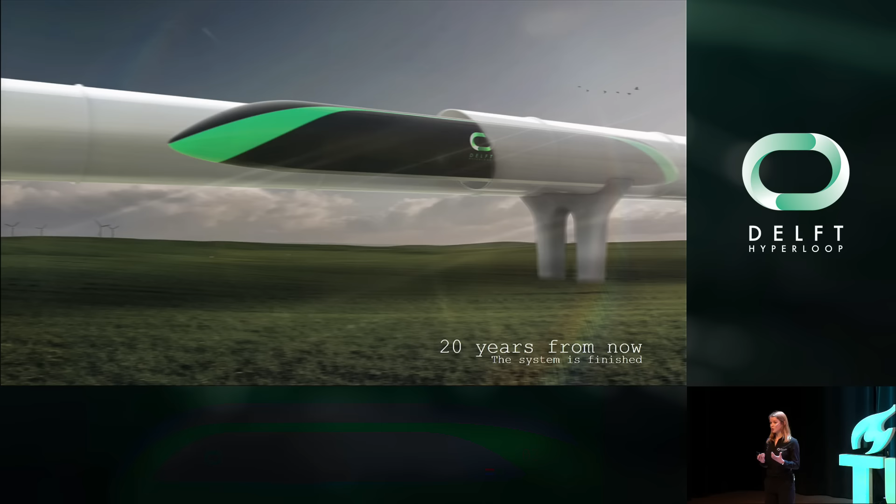So let me take you on a journey to what we envision the future to be like 20 years from now, and we'll slowly count back to where we are right now.

20 years from now, the system will be finished, and it will not only be relevant for us engineers anymore, but for you as well, the future Hyperloop passenger.

So what you encounter is, for instance, the station interior. You can see that it quite resembles a train station, with a lot of light colors, a lot of space. This is because we make use of the same system, a turn-up-and-go system.

This means that you can just go to the station and board whichever Hyperloop you choose.

The exterior of the station can also quite be compared to a train station. You can see that it is very light. It blends into urban spaces, but the large difference is that we don't need to have tracks on the surface.

Hyperloops in urban areas will travel underground, and this way they do not take up significant urban space at ground level.

Being safe is one thing, but feeling safe is at least equally important. Our engineers pay great care to the experience and feeling safe in this vehicle. You can see that we make use of a lot of light colors and natural materials to make sure that

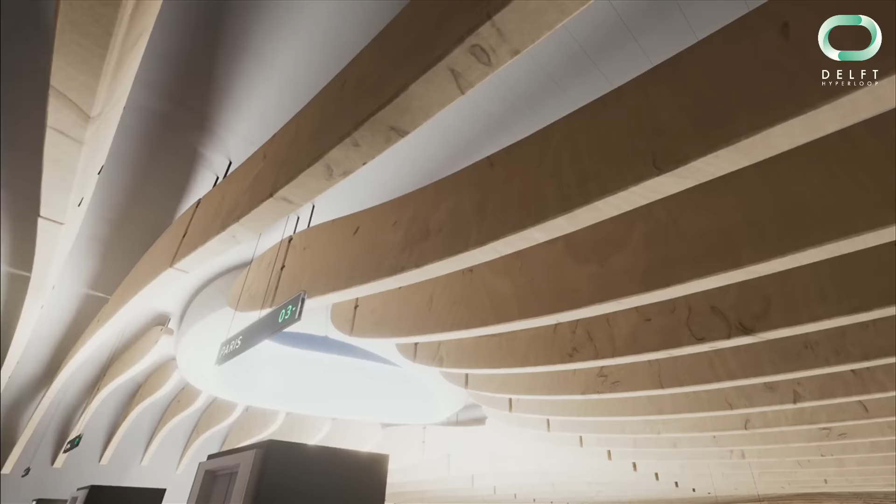You can see that the whole station resembles quite that of a train station. The Hyperloop tubes, even though they travel in a vacuum, enter airlocks before they enter the station, which means that you can safely see whatever is happening around you. You will not have to buy tickets in advance. You can just do that whenever you arrive at the station, and this means that you can leave whenever you like.

The Hyperloop stations have been designed in such a way that it is optimal for the passenger and designed intuitively, so that you will know exactly where to go without having annoying things in your face that tell you where to go.

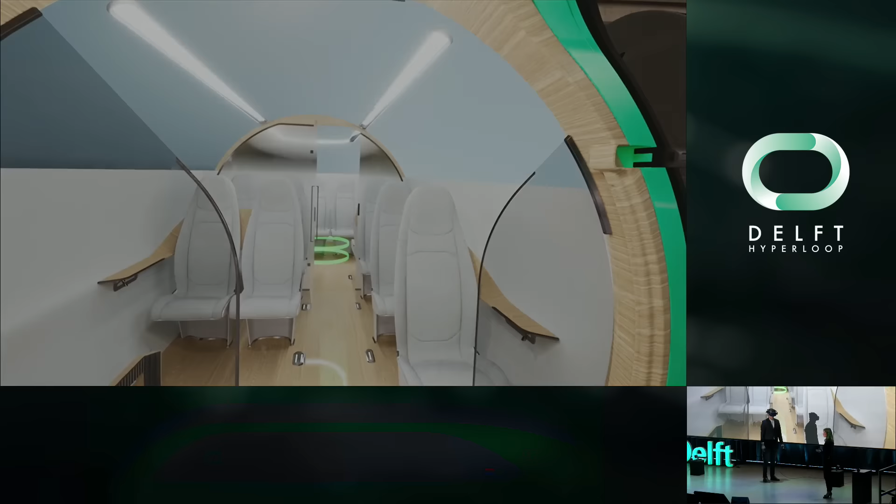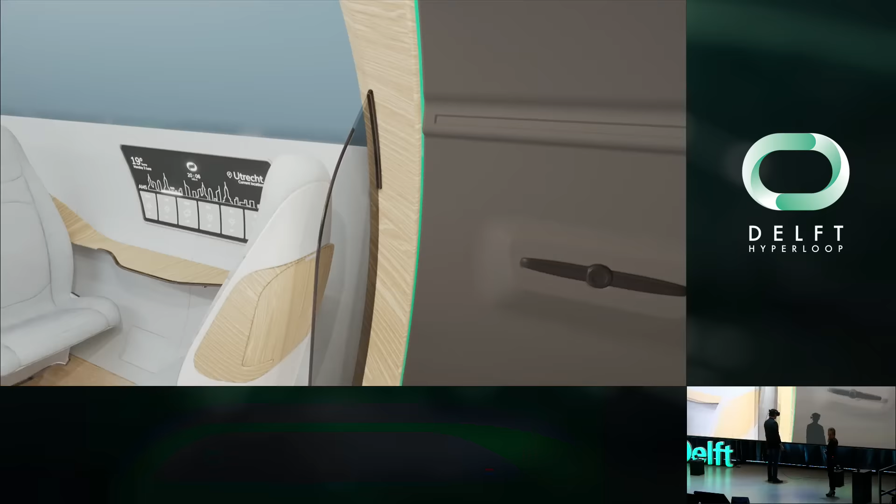The inside of the Hyperloop has been designed to feel as comfortable as possible. You can see the sky panel that mimics the light of day of your destination, which creates an open feel and a more natural feeling to your trip. The screens on the side can be used for whatever you like, to look up information of your destination or to share photos or videos with your peers. The door design is comparable to that of an airplane, as they pretty much travel in the same environment.

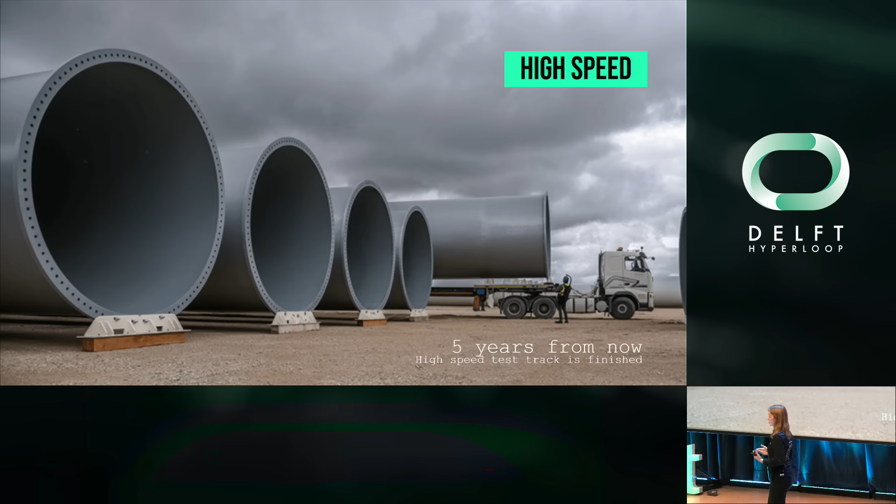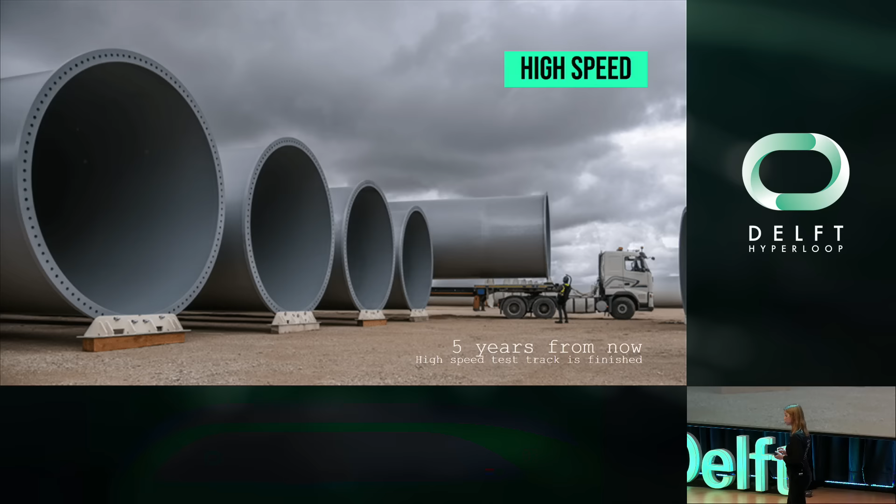To get here 10 years from now, 5 years from now, we will have to have the first high-speed test track. This high-speed test track is extremely important, as we need to guarantee safety for passengers and cargo traveling in these Hyperloop pods. We also need to be able to test out different types of Hyperloop systems, to test out all the various options we think are feasible, to make sure that in the end we can have one Hyperloop system that works for every situation. One of the key factors in creating this high-speed test track is to get politics and the government on board.

In fact, we are already cooperating with various government parties. As of today, we have actually published a report we wrote in collaboration with the government. And this becomes more and more important every day.

This is why Delft Hyperloop has launched Hyperloop Connected. Hyperloopconnected.com is a website where basically everyone can share their research and findings on the Hyperloop topic. We can see it is being used by us, students, but also by companies. It's made to create that one Hyperloop system, so every specialist can work on their specialist topic while still having one point where all the information is gathered. But it's not only for researchers, it's for anyone interested in the topic of Hyperloop. So if you want to know more, please feel encouraged to take a look at hyperloopconnected.com.

And this is what brings us to where we are today, the 3rd of June, 2019, where we will be revealing our brand new prototype. But before we dive into the specifications and the stories behind this vehicle, I would like to give you some background information as to why we're building this vehicle in the first place.

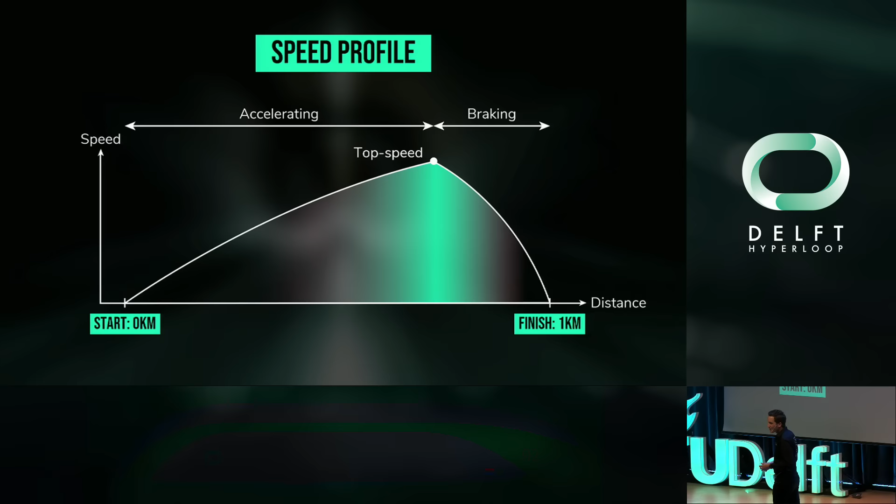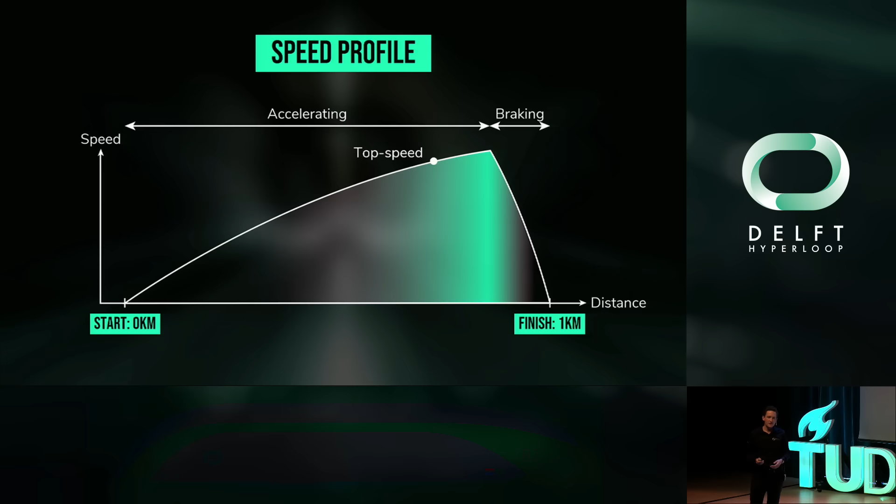And that introduced all kinds of new challenges. A perfect example of such a self-inflicted challenge is our braking performance, because at the end of that tube, we will need to brake and not hit that steel door at the end. So this is our pod speed profile, and we could determine that we need to brake faster. We could optimize our braking system. However, doing so would come at a cost, because all those braking forces would also be introduced in our other components, and we would have to reanalyze the entire design of our vehicle, make sure that all parts will survive these major loads. However, we decided to do so, and that also gained us benefits, because by shortening our braking distance, we can accelerate longer and thus reach a higher top speed.

Doing all of this in one year is a major challenge. Overcoming all of this is nearly impossible in one year. Yet the challenges we talked about so far are purely technological. And yes, we are here in Delft, and we like to talk about technology—it's called Delft University of Technology, after all. But these challenges just scratch the surface. They're the tip of the iceberg, and they do not cover the entire story.

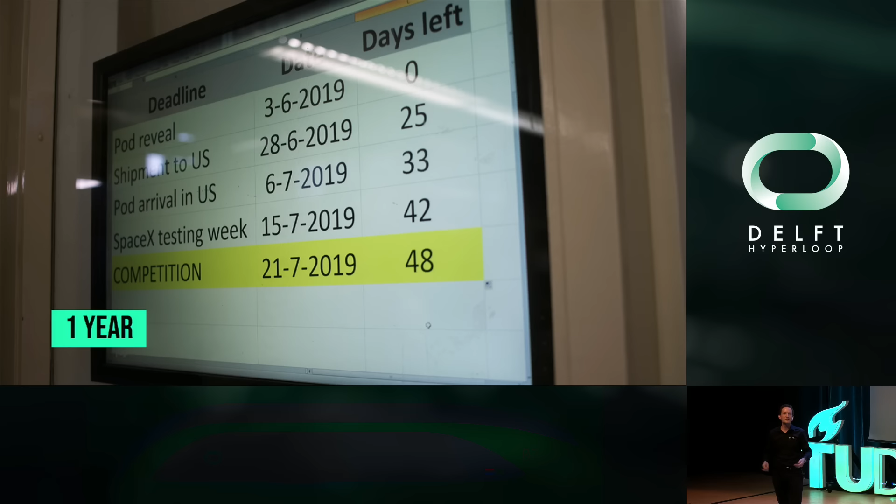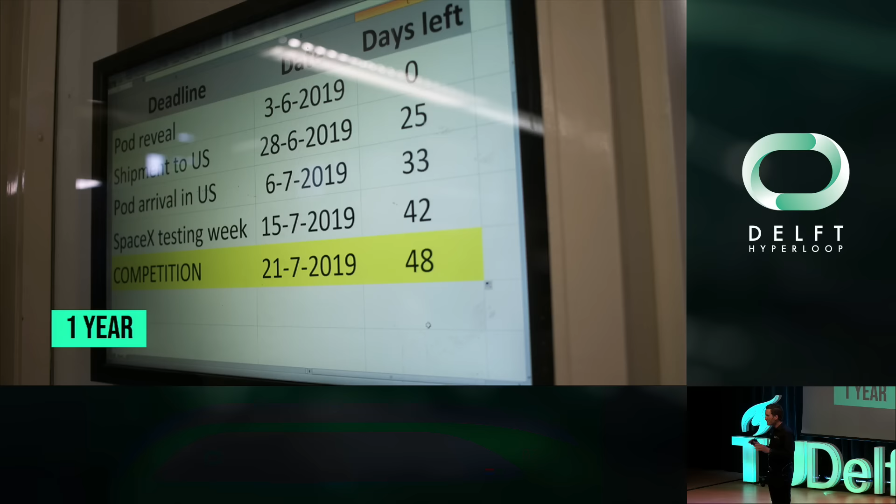All of these challenges are the ones we foresaw at the beginning of the year. We based our deadlines around it, determined our planning, and built our team structure around these challenges. However, you could also have foreseen them, even though you're not part of the team. This afternoon, I'd like to tell you some of the things we did not foresee—the unpredicted—because those things greatly shape our learning and our experience.

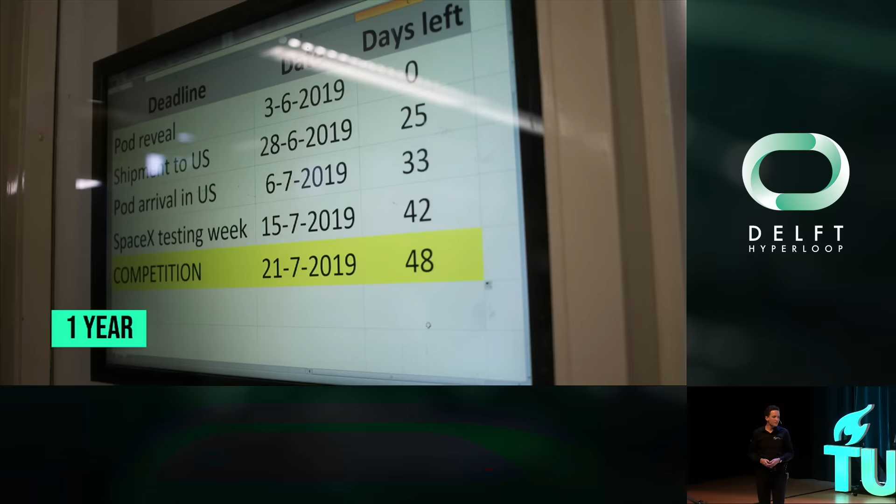We started the year with 40 team members. Within this team, we share a lot of similarities. We're all approximately the same age, most of us live in or around Delft, most of us have finished our bachelor's, and of course we're here with one clear goal: winning that competition.

But if we take a closer look, we can also find our differences, and some of them are easy to overcome. For example, we all have different body lengths, but we can deal with that—with some flexibility in how we cooperate, we overcame this challenge. We all have our own different habits and ways and styles of working, but that's fine, we got used to that after several weeks.

But we also have 11 different educational backgrounds in our team. And that's a good thing, because we have specialists who can work on the subsystems of our pod—someone good at working on each of those subsystems. However, it's also like we're speaking a different language. We all have our own set of skills that match our studies, and sometimes that does cause some difficulties.

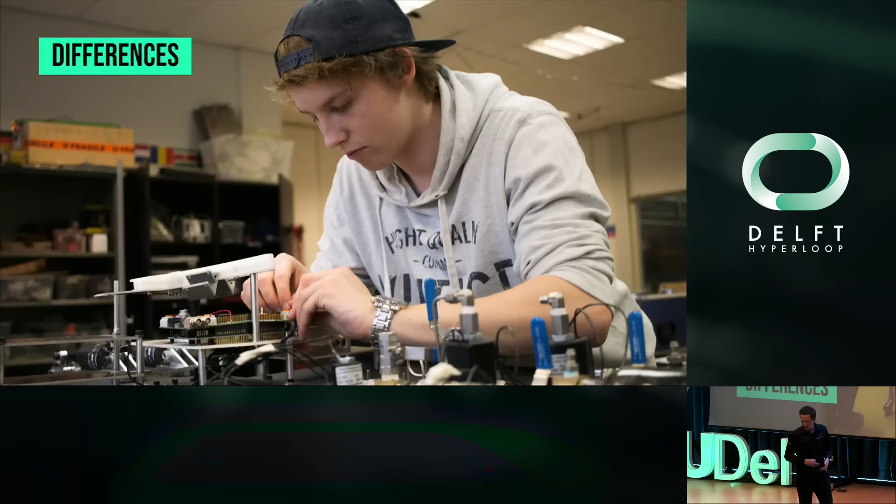For example, this is Detmer. He's the lead of our navigation and control department, and I still recall the first meeting I had with him. I went down to his workplace and we tried to talk about planning. But instead of replying to my questions, Detmer started talking in 3-letter abbreviations—I'm working on the EMS, the FSM, the IMU—and I had no clue what he was talking about. I didn't understand his language. So that meeting, we did not talk about planning; instead we talked about the way we work, and we learned how to communicate together.

Even though we have differences within the team, we're all still located here in Delft, the Netherlands, so we're working according to approximately the same rhythm and enjoying the same holidays. But as a high-tech engineering team, we work together with companies from all around the world, and we find different cultures at other places. For example, we work with a Chinese company that manufactures our battery cells.

One of the major holidays in Chinese culture is Chinese New Year. When we started this year, we had no clue that this event would shape our own planning and our internal deadlines. But as soon as we figured out that China goes on lockdown for a few weeks during Chinese New Year, we had to shift quickly, because the powertrain engineers had to design the batteries, test the cells, and order them before Chinese New Year would start.

But there's more to the story, because this is not only about the surprise of different deadlines we find due to cultures around the world—it's also one of the first instances where we were surprised by the difference between theory and reality. We had been designing our battery system around a specific cell we found on the internet that would outperform all other cells. Then we started testing, and we found a cell that was even better—it outperformed our original design.

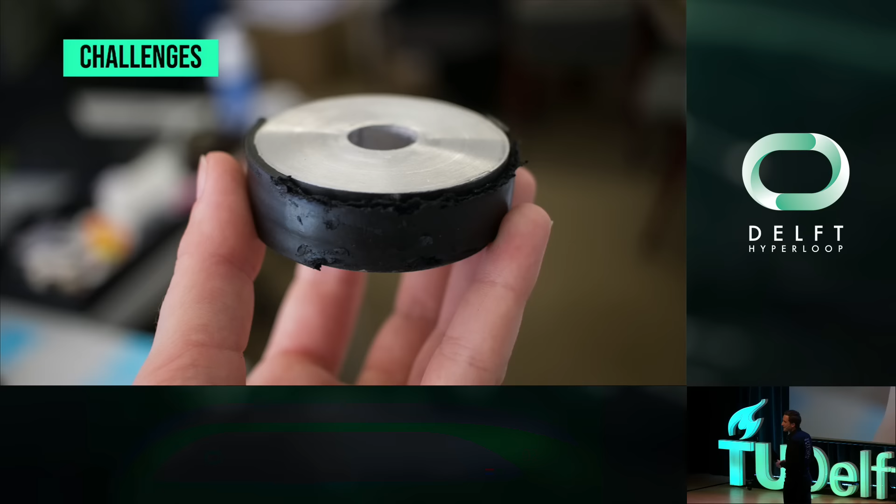As I mentioned, our wheels will rotate at hundreds of rotations per second when we are reaching our top speed. And while doing so, they will hit the bumps that are caused by the track misalignments. And this is a major, complex dynamic problem that's almost impossible to calculate or to model in a computer. So what we do here, we get our theory as good as possible.

We make the best design we can come up with, and then start testing. And in these cases, it's not about reading the manual, it's about making your own. And overcoming these challenges is not only about the result itself, it's about learning, it's about discovering, and it's about finding our own strengths and our own weaknesses.

At the beginning of the year, we knew that one day we would enter the production phase. And as we have a totally customly designed vehicle, we knew that many of our parts would have to be produced by ourselves. We cannot go over to the store and buy our suspension mechanism. It just does not exist. So we need to make it ourselves.

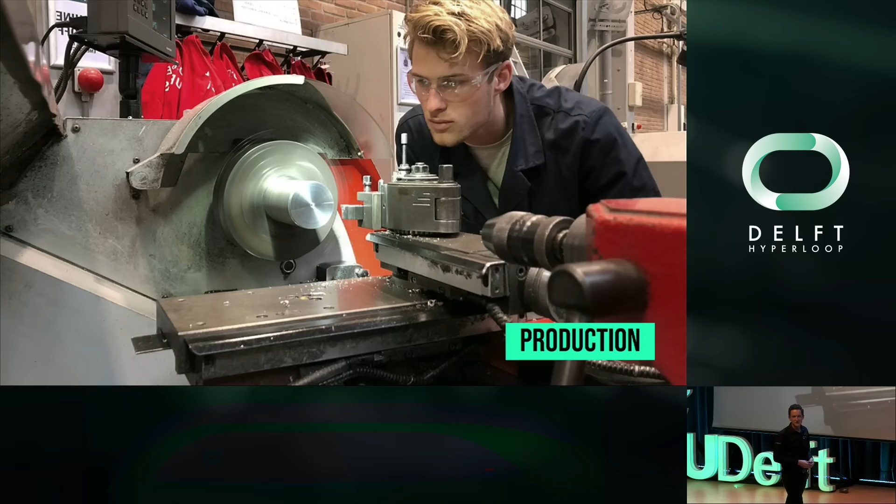But also, at the beginning of the year, most of our team members had never touched a machine before. We didn't know who would be good at turning, we didn't know who would be good at milling, and we had no clue whose talent lies at what machine. But what we did know is that we would have to make all these parts by ourselves.

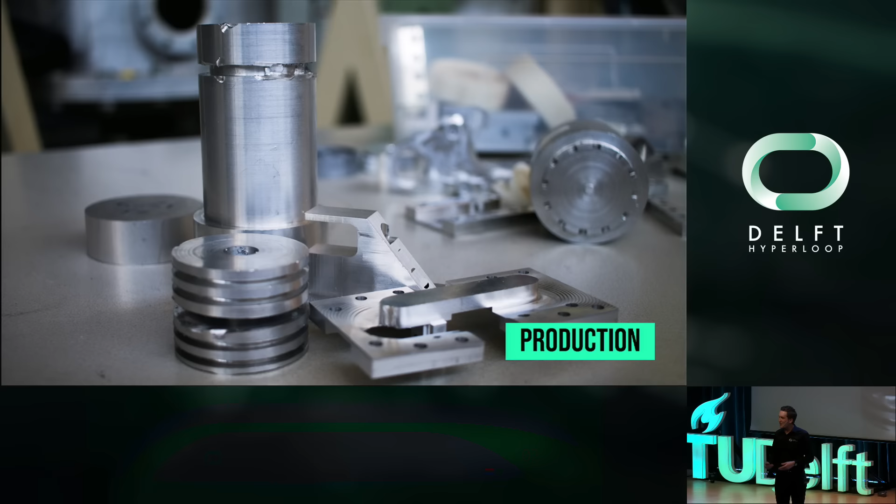And at the beginning of our production phase, mistakes were made, and we have a whole collection of failed parts in our office. But that's fine. In the end, we're all doing this for the first time, and we need to learn by trial and error. We need to learn how to do this.

But after several weeks, we still had barely any parts that were approved during our quality control. And time was running out, as our assembly deadline was already approaching. So we sat down with the entire production crew and we had a meeting. And we discussed, how can we solve this? How can we make sure that we finish our parts in time?

And we determined who was good at operating what specific machine. We determined who was good at making what specific part. And we matched our strengths with our challenges.

But these failed parts were not only caused by our own mistakes, we also had some bad luck. Upon inspection, we found a caliper, which is a measurement device, that had a deviation of 0.2 millimeter. And this might not sound as much, in the end it's only the thickness of a sheet of paper. But for our purposes, this is not good enough.

For many other applications, a deviation of 0.2 millimeter will be fine. You can just use the part and everything will work as it should. But in our case, a deviation of 0.2 millimeter might lead to the part failing at high speeds, or might lead to entire assemblies not fitting together anymore. So we had to stick to our own quality criteria, and we redid all of those parts that deviated by the thickness of a sheet of paper.

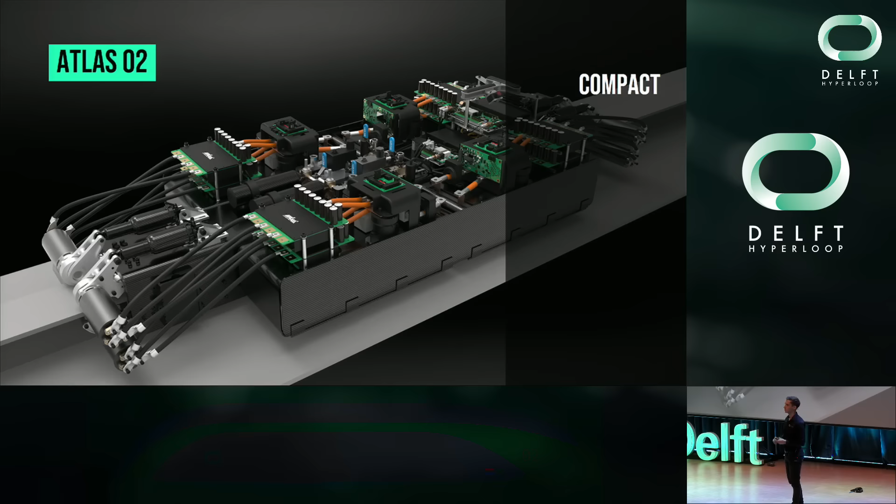Secondly, we have a fully electric vehicle, and this allows us to quickly accelerate from standstill in a short period of time. Without any mechanical components, we can do this easier.

During the run, ATLAS02 functions fully autonomous, meaning it makes decisions and controls the pod without any user input. At these high speeds, human reaction time is just not fast enough anymore. We need to make split-second decisions, which is what the onboard computers can do.

Furthermore, the vehicle is wheel-driven. It's propelled by 8 electric rotary motors. By using electric rotary motors, we can propel efficiently, but most importantly, with very little mass, and this allows for a quick acceleration to our top speed.

I will explain the pod's functionality and properties by walking you through a final run, that one final run at this competition. So imagine it's the 21st of July, competition day. The whole team will have gathered in front of the SpaceX headquarters next to this vacuum tube. We transport this pod just in front of the tube.

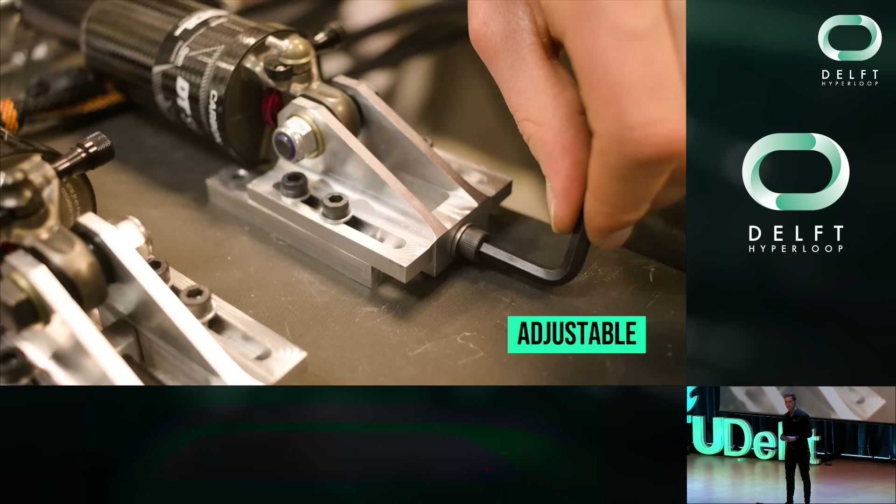Having cranked out these numbers with the vehicle dynamics model, we install them on the pod. We set the right configuration on the shock dampers and put them into the correct orientation with the adjustable brackets, ensuring we have exactly the right clamp force. After the whole suspension is set, we can power on the vehicle, by a simple press of the button on top of the pod.

All the low voltage electronics will be powered on, including the CPUs, which are the computers acting as the brain of our vehicle. With all the data it gathers, they can make split-second decisions, which is just what we need.

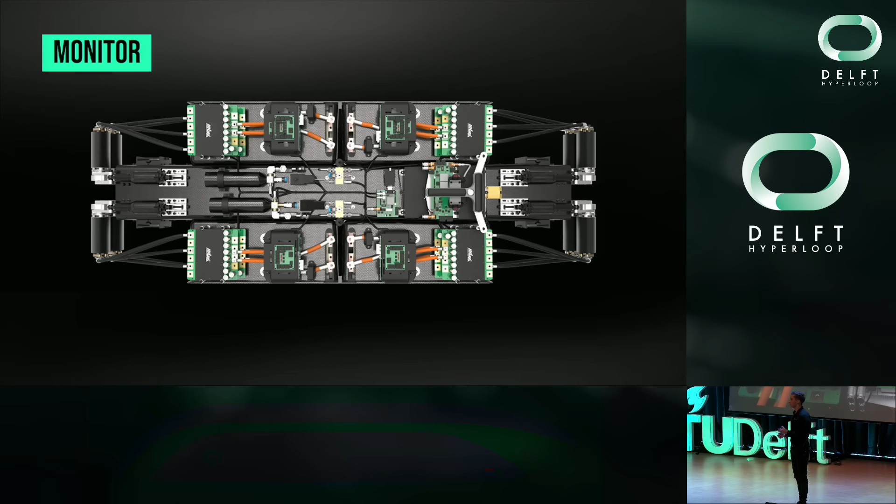The pod will automatically establish communication with the user outside of the tube, and the user can monitor the pod. It can see, for instance, the speeds of the drive wheels, which we can derive the speeds from. The battery health, by looking at the temperature and voltage, ensuring healthy batteries before we commence a run. We have brake pressure to check whether we have enough storage on board to quickly brake to standstill at the end of a run. And, for instance, the ambient temperature and pressure, knowing exactly at which conditions the pod runs.

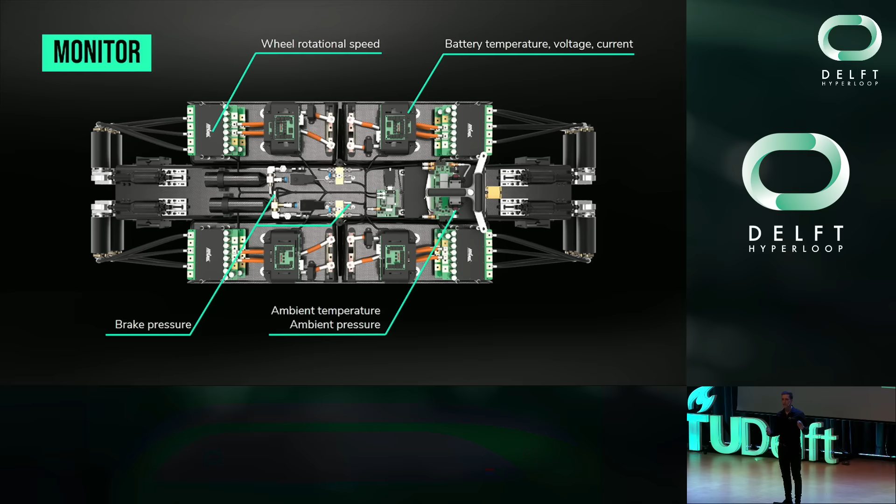The communication is established, and now we can pressurize the pneumatics, the high pressurized air system we use to activate the brakes. We pressurize the pneumatics with over 50 times atmospheric pressure, allowing for compact and lightweight energy storage, which you can use to explosively brake to a standstill. The pneumatics are pressurized, marking the end of this phase.

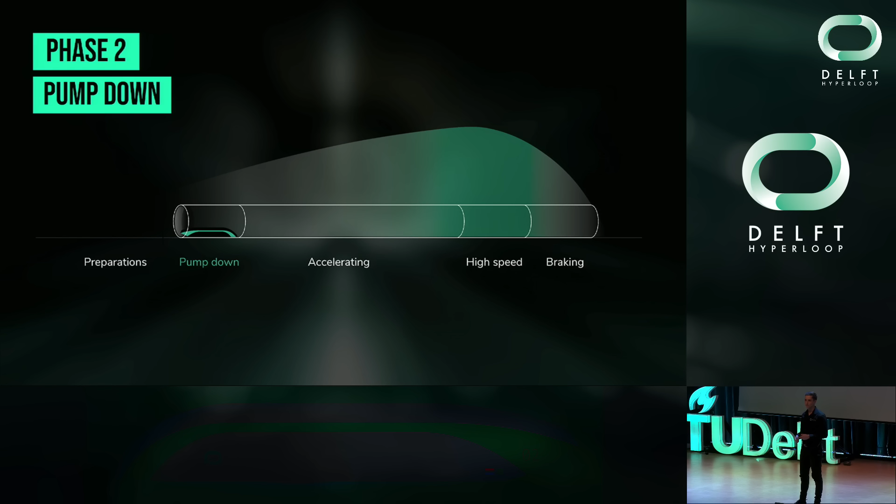We can proceed to the pump down phase. The pod will be transported to the start of the tube, and the SpaceX employees will close the 2 doors at both ends. The pump down will commence.

While the pressure in the tube is going down and we're reaching near vacuum, the tension in the team is building up. Because at this moment, everyone in the team knows that we're approaching the moment we've worked an entire year for. Everything has to come together. There's no room for errors. There's no room for inaccuracies.

We have to go. So we issue a final command. We launch, and the pod quickly surges forward, reaching towards the end of the tube. And we're in the next phase, the accelerating phase.

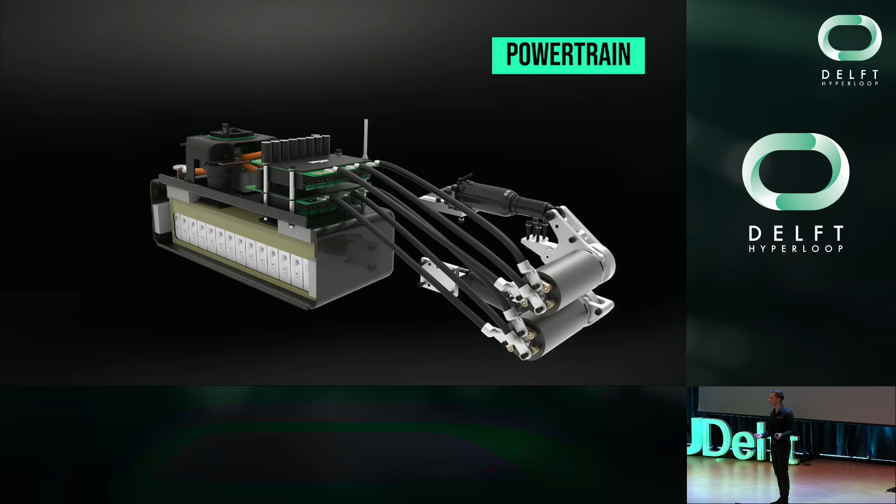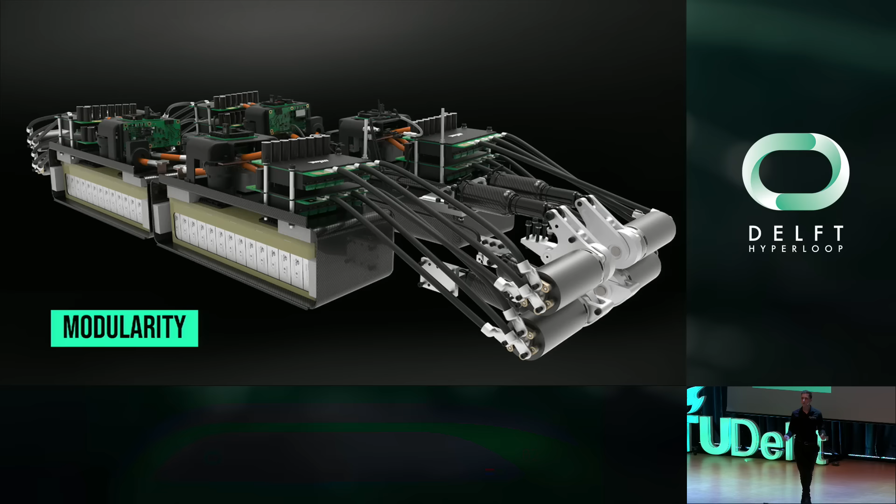At the core of this acceleration, we have the powertrain. The powertrain consists of a battery pack, 2 motor controllers, 2 motors, and 2 drive wheel mechanisms. One of these powertrain systems can power enough to light up over 5,000 light bulbs at the same time. And we do not use just one of these systems, we use 4 identical systems on our pod, allowing us to reach the high power output that we need.

Having 4 identical systems gives us certain modularity in our design, and modularity has 2 key benefits. First, producibility: we have fewer unique parts, allowing for easier series production. Secondly, testability: if we test just one of these modules, we already have a good indication of the overall performance of the vehicle, and testing with just a quarter of the power is much easier.

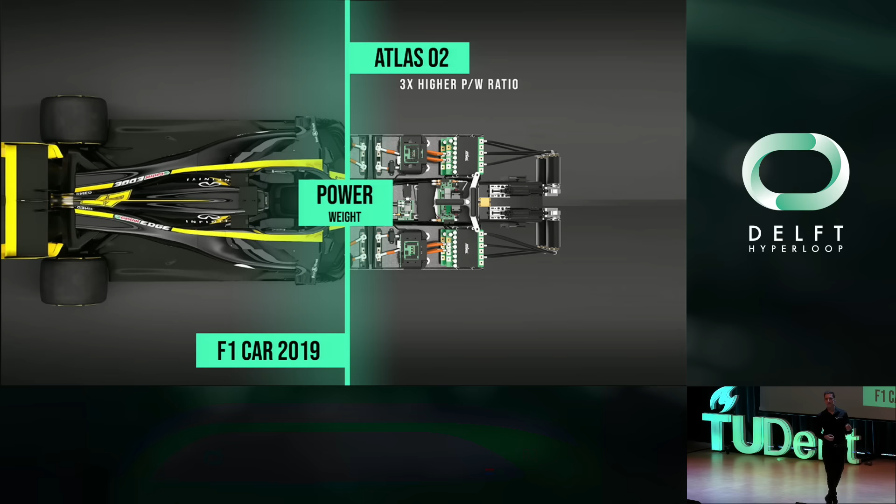These 4 modules together generate the extreme power output, giving us an extremely high power to weight ratio, which we can see once we compare it to a Formula 1 car, one of the fastest and most technologically advanced cars in present day. The power to weight ratio of our vehicle, however, is 3 times as high as a Formula 1 car, allowing us to quickly accelerate to our top speed.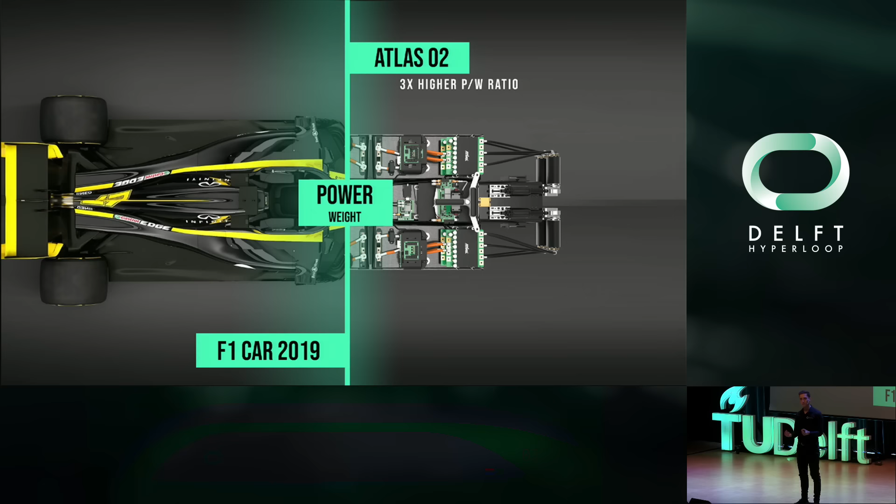To understand how it reaches this performance, we have to trace the power back to its source: the batteries. The batteries consist of lithium polymer cells, which we put next to each other and layer in an efficient manner, allowing for dense packaging. We build a custom structure around it for a very lightweight design, and we laser weld each individual cell together to have low resistance during discharge.

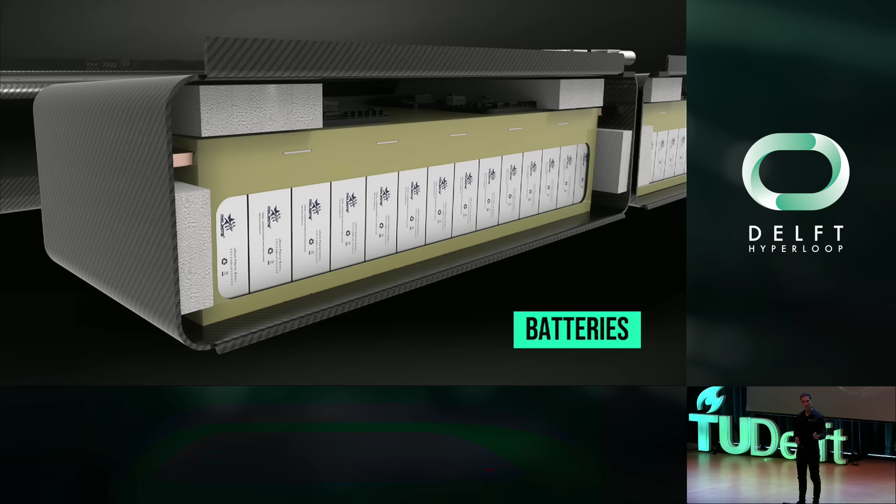To meet the power requirements, we use a lot of these cells, almost 1,000 just on our pod. Having this high power demands certain safety and monitoring, so we monitor each individual cell, and can see whether each cell is healthy, ensuring the whole battery pack is healthy before we commence a run.

During acceleration, the batteries discharge current, which we follow outside the battery box towards the motor controllers. The motor controllers convert this power into power that the motors can use, and while doing so, they can accurately determine the speed of the motors, and therefore accurately control the speed of the entire vehicle.

Following this current to the motors, we see it converts electrical power into mechanical power, allowing rotation of the axle inside. This axle is directly connected to the drive wheels, allowing for a direct drive mechanism. Using a direct drive mechanism, we can reduce the transmission loss you'd otherwise have with a gearbox.

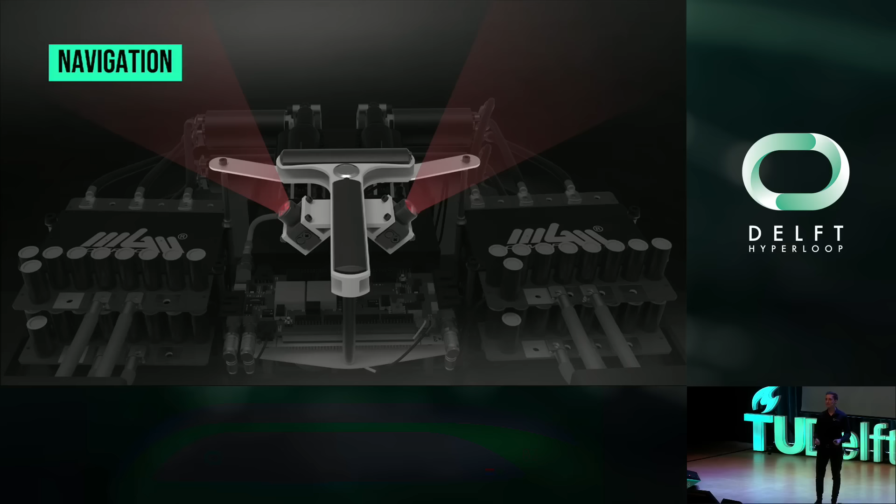We can't use GPS because the pod is surrounded by a thick steel tube, so we use the light strips inside these tubes instead. Light strips are positioned every 30 meters along the length of the tube. With diffuse sensors located on top of the pod, we detect these light strips by detecting the reflected light touching and reflecting from them. We count these, and then we can quickly determine our position.

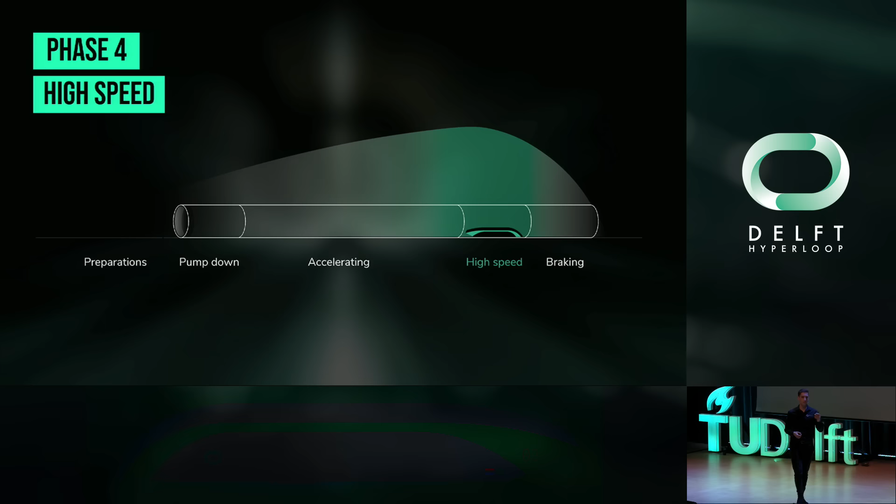After counting 30 light strips, being 900 meters onwards, we reach our most critical phase, the high-speed phase. In this phase, the pod faces its harshest conditions, because not only will the electronics reach the highest temperatures, the track irregularities will induce extremely high loads on the drive wheels.

This allows for a certain stability on our vehicle. We have the suspension system, which stabilizes the pod in vertical direction with the drive wheel mechanism, and in horizontal direction with the lateral guidance mechanism located inside the chassis. This stability is extremely important, because at some points the clearance between the track and the pod is less than 10 millimeters - 10 millimeters away from catastrophic failure. But suspension ensures we never touch the track, even at the high speeds we encounter.

At the end of this phase, the wheels reach their maximum rotational speed. As Arjan mentioned, this poses a challenge, because no tire survives - they all get ripped off. This is why we don't use any tires on the wheels; we have a pure aluminum rim, because tires do not survive.

At the end of the phase, we reach our top speed, where we aim to reach half the speed of sound. But we're now nearing the end of the tube, so we have to enter the next phase, the braking phase.

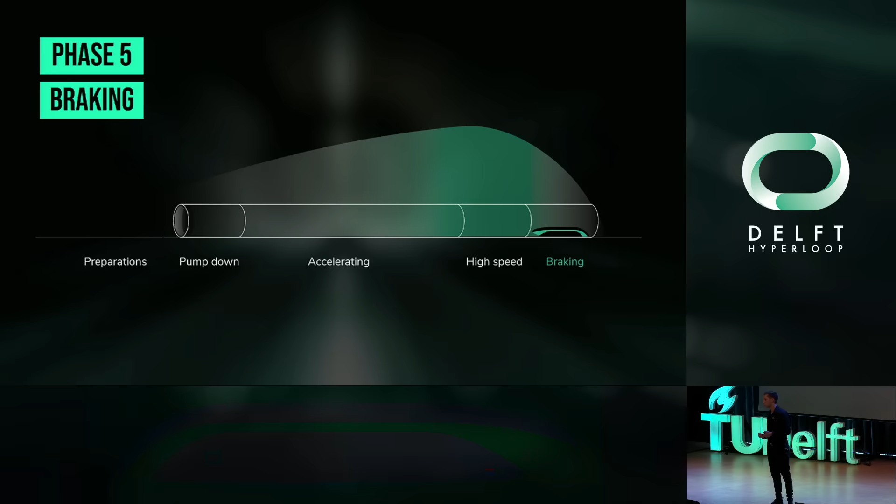Now we reach our top speed, and we have to brake. We brake using the pneumatic system. The high-pressure gas in the pneumatic system is released to the calipers, which house 16 pistons in total. The high-pressure air explosively presses onto these pistons, clamping the track in between the brake pads, generating a huge deceleration on our vehicle, bringing it to standstill.

I could tell you everything about this deceleration and show graphs of how it performs, but it would be wise to compare it to something everyone knows: cars. A Lamborghini, for instance, decelerates from 100 kilometers per hour to 0 in just 2.3 seconds - really fast for a car. This corresponds to a braking deceleration of 1.2 g.

A Formula 1 car, the fastest and most technologically advanced car in present day, can decelerate up to 6 G. This is comparable to the highest G forces you encounter in one of the most thrilling rides around the world.

But ATLAS02 doesn't come close to this. No, ATLAS02 exceeds it, because ATLAS02 decelerates with a peak deceleration of 20G. And this is insane if you think about it. To put it into perspective, if you were to drive your car at 100 kilometers per hour and you were to brake with 20G, you would be standing still in 2 meters. But we do this just because we want to win.

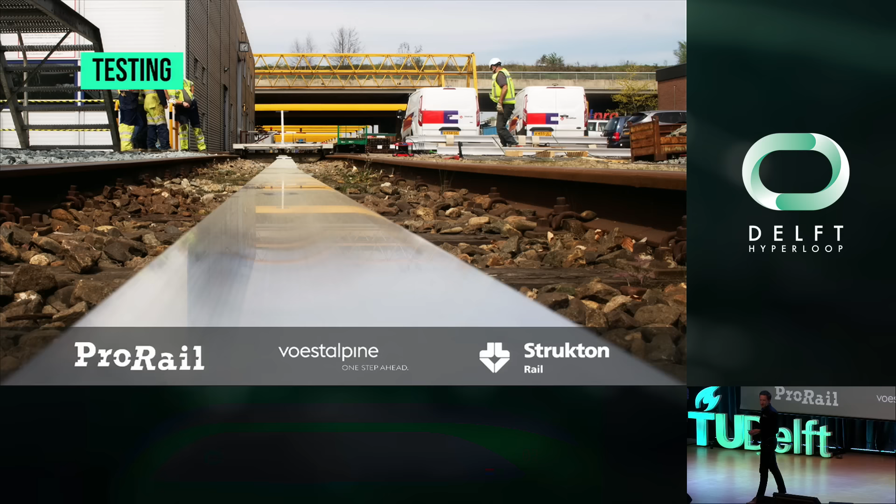We partook in vacuum tests. We did free spin tests. But this year, there's something new, because in close collaboration with our infrastructure partners, we have built a 400-meter long Hyperloop test track in Hilversum. And on this track, we will test our pod at high speeds, making sure that it can output the performance we need before we ship it over to California.

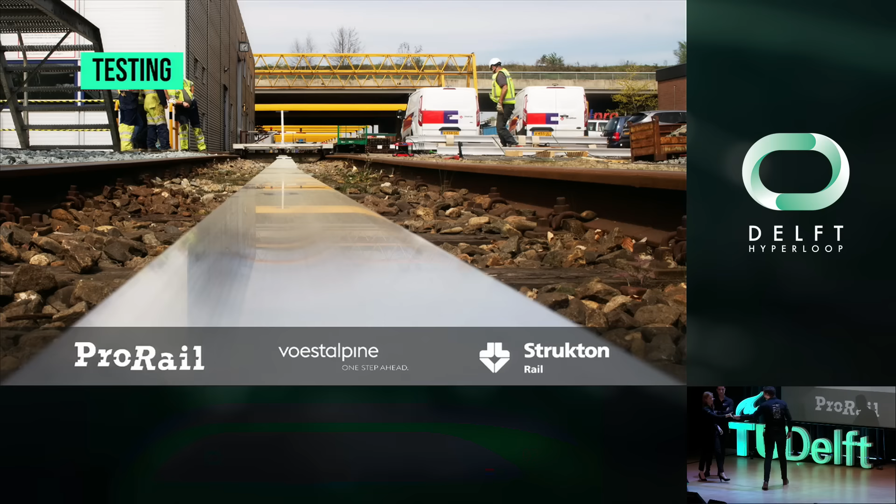And that is what brings us to the last stage of our year. The team will travel to California, where we will do the last final adjustments to our vehicle, before we can finally convince the SpaceX engineers of the properties and capabilities of our pod.